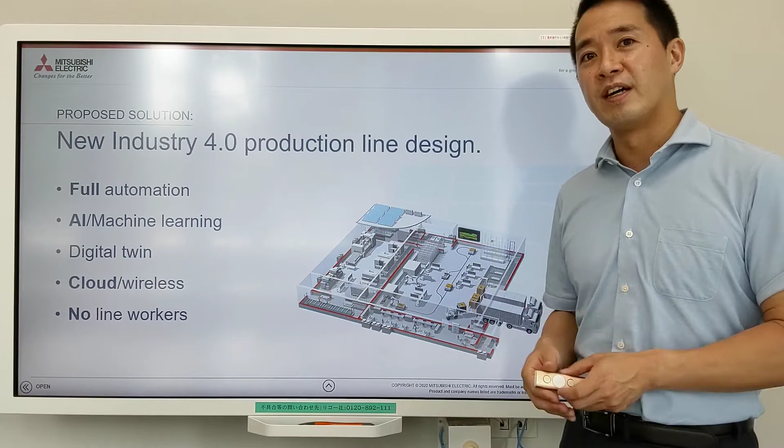Here's an example that happens a lot. New Industry 4.0 production line design. So there's a new product coming out and they want to do an investment. So they said, oh, this is a great idea to test Industry 4.0. So let's do full automation. We want to install AI and machine learning. We want to do the digital twin. We want to connect cloud, use wireless 5G technologies, and make a fully autonomous factory with no line workers. Okay, let's start the project.

But a lot of time, the proposal is rejected. The first is the high cost involved in these kind of applications. Normally, a production line manager is used to working with machines, robots, PLCs, sensors. But if you want to do this kind of Industry 4.0 type application, you're going to need different aspects. You're going to need to calculate the server costs, the cloud costs, the AI costs, the drone cost, and all the communication costs related.

And usually we are not used to working with those kind of vendors. So it takes a lot of time to get the quotes together. And when you get the quotes, usually it's an unbelievable high amount of cost. Okay, you look at the quote, but this is the cost of Industry 4.0 and IoT. As long as I get the return on investment, then we can justify the costs. So then they start calculating the return on investment.

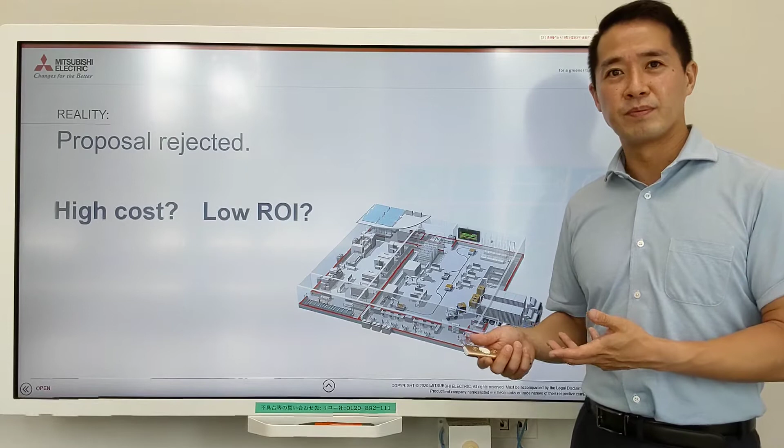But it's really hard to calculate return on investment in Industry 4.0. For instance, predictive maintenance. Can you really predict and estimate how much cost you're going to save? How much time you have saved the line from stopping? How much is AI going to help you, even before you get a result? So it's really difficult to calculate the ROI as well. And what happens, and what is the true story, is that nobody knows about Industry 4.0 industrial IoT because nobody's made the factory by themselves.

At the end, a lot of time, the project is rejected because they cannot justify the ROI. They sit down with management, they look at the high costs involved and say, okay, maybe it's too risky, it's too expensive. Let's do it the second time around. And the project doesn't go through. And this happens a lot.

Another company says, okay, we don't want to do a full-scale production line. Let's maybe go into detail for this machine because it stops the production line a lot with quality issues. This is an example of a customer that has a plastic injection molding machine, and a lot of times the quality goes bad in the product.

So they said, okay, we have this quality issue, but if we look at the parameters of the machine, we monitor the electrical currents, vibration, maybe we can find out the problems of the product quality before it goes wrong. So they said, okay, let's use data, let's do a data analytics project for predictive maintenance for this machine. We want to improve quality, and in order to do that, we're going to use real-time data collection, real-time data analytics, edge computing, and AI to do this.

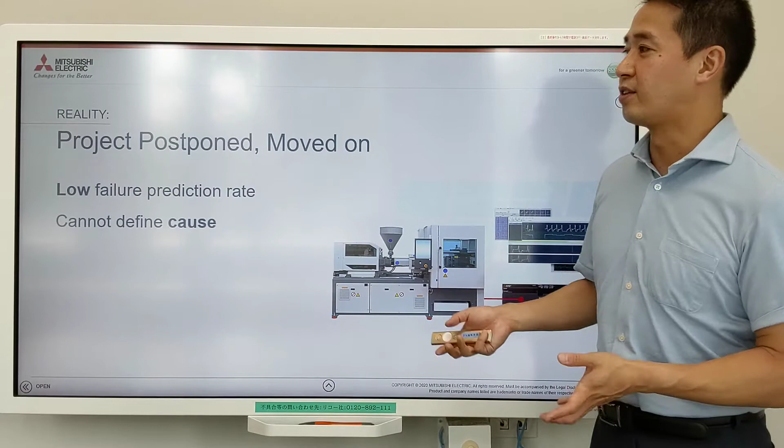The other issue is, even if they could find that something was going wrong in the machine, they detected the data was going in a bad direction, they could not define the root cause of the failure. So they could not say, okay, this motor is going wrong or this gear is going wrong. So what they had to do is maintenance on the entire machine because they couldn't find the problem. So they had these two issues and said, okay, this is not fit enough for manufacturing.

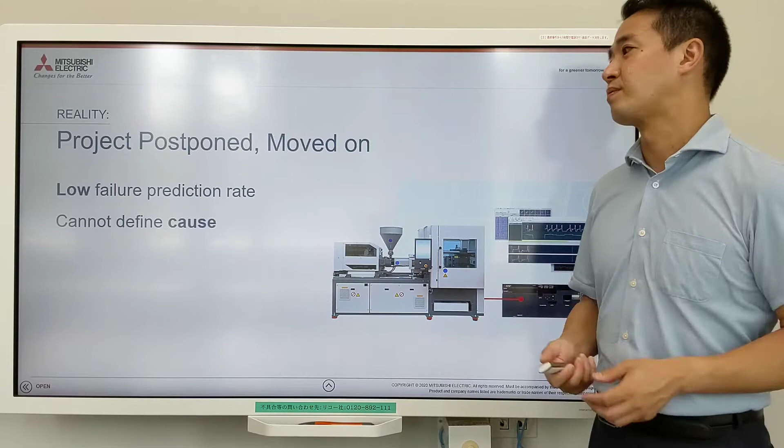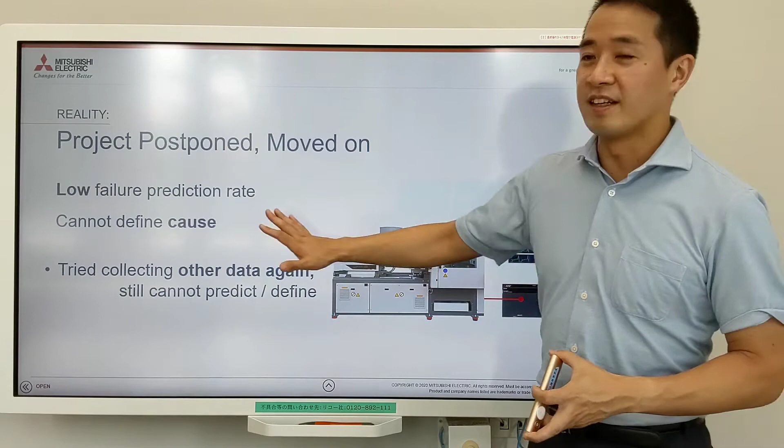What they did is they did it again. Let's try other data, collect other data again, and then see if we can find the root cause and raise this failure prediction rate. Okay, it moved from 50% to 70%, but still 30% of the time they could not predict that it was going to fail. And they still could not define the root cause of failure. So another 3 months wasted, total 9 months wasted. So they said, okay, this is not good enough for prediction. It's probably better off if we do maintenance on this machine periodically.

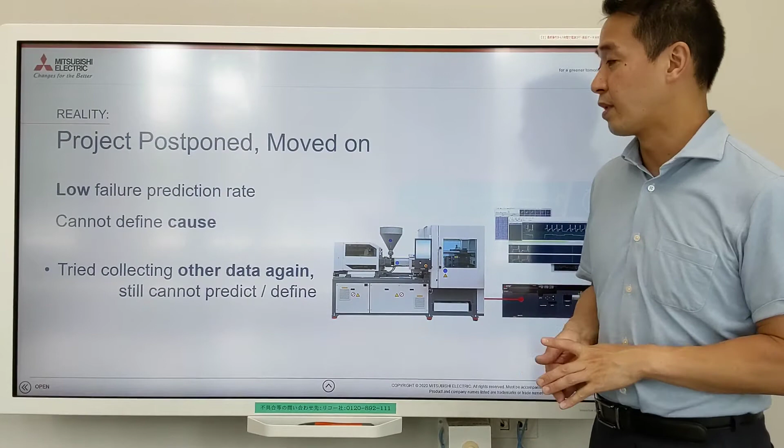And on the other hand, usually when you do IoT projects, you're using your ace engineers on the factory floor. So they had the ace engineers on this project tied up for 9 months. They said, okay, this is not a good use of resources. Let's fold up this project and use these key engineers on something where we can get a better ROI. There's no sense in doing this project again and wasting another 3 months or 6 months collecting data. So they moved on, and the IoT project stopped.

These are just two examples of failures, but there are many, many more failures in IoT that we've heard from our customers. For instance, you monitor the energy in your factory, but you don't know how to save the energy. You're just monitoring and looking at these neat screens. You're trying to install sensors into old equipment in order to gather data, but the installation cost is incredibly high because you have to reroute the wiring, and sometimes you even end up engineering a new machine because it takes too much time putting these sensors on an old machine.

Data analytics are very complicated. A lot of times the factory staff does not know how to handle it and use the software, and then you use consultants to try to help you. But of course, the consultancy cost for data scientists is not cheap. So there's all these failures. So, it's not easy, industrial IoT.

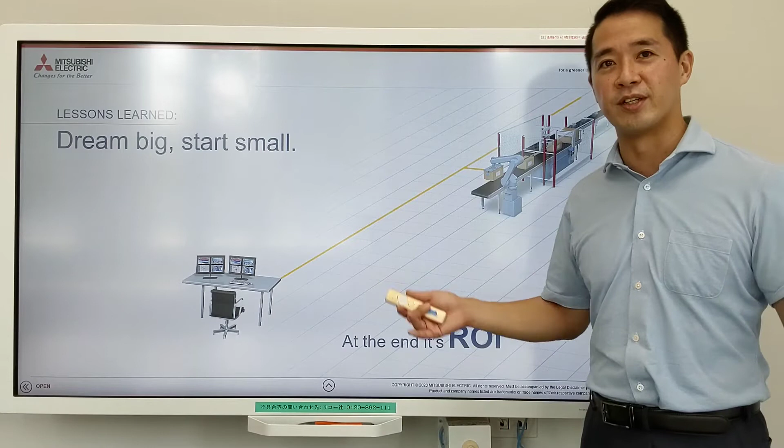One advice and one lesson we learned ourselves is, of course, you need to dream big when you do Industrial IoT or Industry 4.0. There's a whole picture, including the supply chain, how you want to integrate data, put it into the cloud. But when you do these kinds of IoT investments, you want to start small, where you can calculate. Don't start with the entire factory line. Start with a single cell, for instance. Go to the packaging machine, see if you can replace it with a robot, see if you can use the data to improve your processes, and calculate if you're really getting return on investment on this application.

I mean, at the end, you can spend tons of money on Industry 4.0 and IoT, but if you don't get the return on investment, it's not worth it. Right? We're in manufacturing. The main driver is cost.

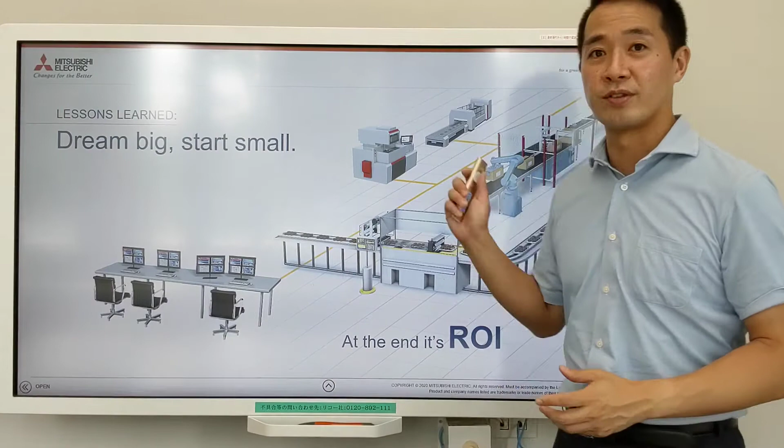If you're successful at this, then you can move down the line. Okay, try other machines, see if you get ROI, and if with each machine you see you're getting your ROI, then you can look at the production line as a whole. So it's a step-by-step process, but always calculate the ROI.

One more important thing we think is to set KPIs and agree on this with management. Where are you going to put IoT, what level you're going to put IoT, and what direction you're going with IoT. Because the expectations from the factory management, which usually don't have a lot of knowledge about IoT, are very, very different from the expectations and the results that the production line can produce.

I mean, mostly management thinks with even a small investment, you can get data analytics, you can get AI, and you can get Kaizen, which is not really the story. So first, when you start a project, you always want to be in agreement with management on what you're going to achieve out of this project.

I have a map over here, and if you think about it, when you ride a boat, you always want to define if you're going from Japan to Europe, or if you're going to Hawaii, or if you're going to Africa. Why I'm saying that is because the resources from people, the food you put on the boat, and the gasoline you put on the boat are totally different.

And you need to define these resources before you start the project, because it's going to cost money. So that's why we always say, okay, first set some KPIs, what you're going to achieve, and then start the project.

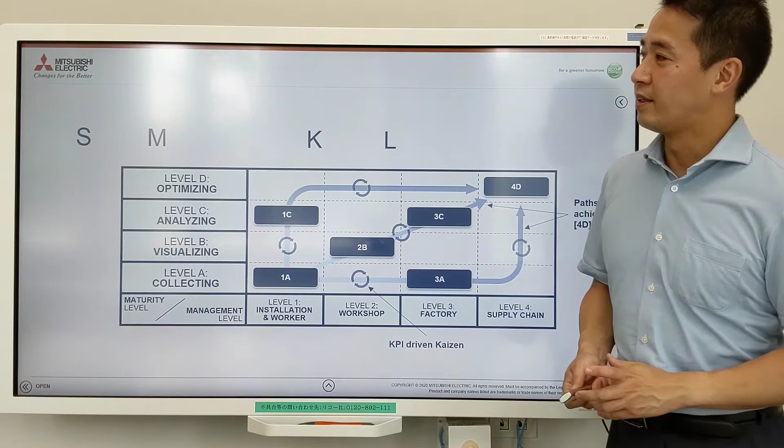This is why in Mitsubishi Electric, we use this kind of KPI agreement process called Smart Manufacturing Kaizen level. When we start a project, we always try to decide with management where we're going, what level we want to achieve with IoT, and then define the KPIs related to that.

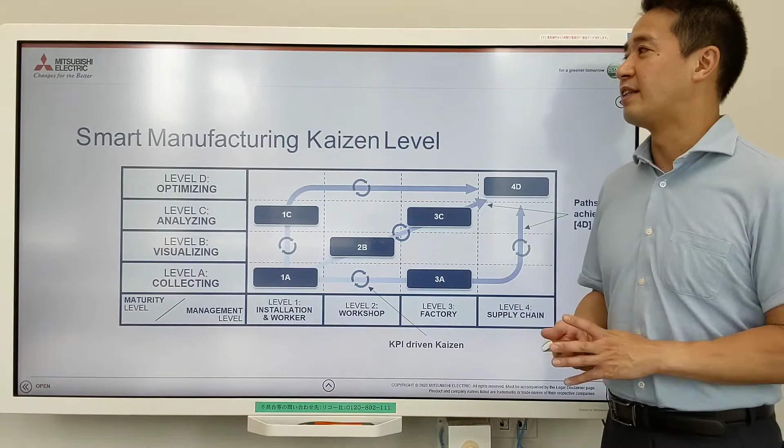After we install the project, we talk again and say, okay, this was achieved, and we got our ROI back, so can I move on to the next level? This is a kind of tool that we use to get everybody in sync.

In the first survey, I talked about how there need to be steps in going into manufacturing. I mean, most of the companies want to do Kaizen, they want to use AI, and they want to use optimization, but without data, you can't do anything. So that's why, in terms of maturity level in a factory, we always start with the level where first you have to collect data.

Only after being able to collect data can you visualize it. After you visualize it, put it in charts, then you can analyze it. And after you analyze it and you're able to say, okay, something is going wrong, so let's send an alert, then you go to the phase which is called optimization.

For instance, okay, we've analyzed that the temperature is too high, then let's open this valve so we can put in air and water to lower the temperature. It's always a step-by-step procedure with IoT. In order to get to this analyze phase, this optimize phase, you first have to collect. So the first steps of investment are always collecting the data and visualizing data. And this is a step-by-step process.

It also corresponds to the area; you have to go step by step. I mean, you're not going to be able to do IoT Industry 4.0 in the whole factory. It's always a sum of the individual parts. So first, for IoT, you would work on a manufacturing cell level or a machine level. After you're able to achieve IoT on this cell, then you can move to other machines.

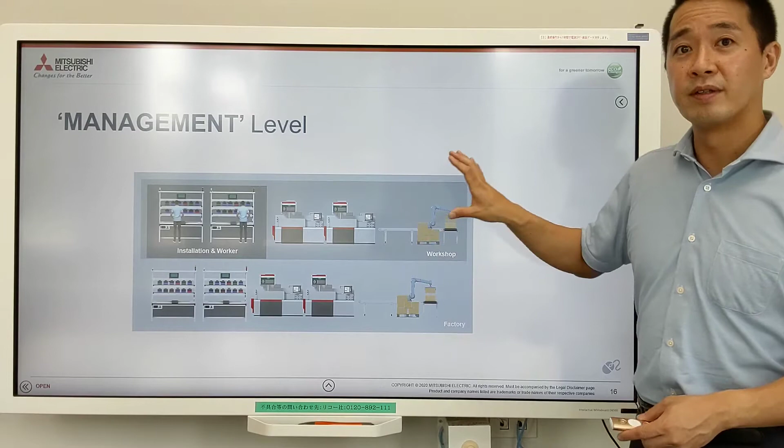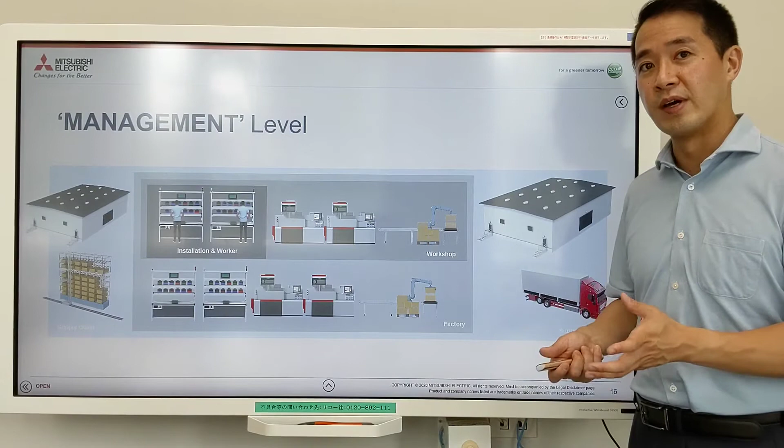And if you're able to put IoT on all these machines, then you can do the analysis and optimization of IoT on a line level. Then you combine lines together, manage IoT as a whole, the entire factory, and after that, you can start working with separate companies, external companies, in order to optimize your supply chain. But as I said, it always starts small, and then you have to expand. So it's a step-by-step process to do this.

And that's what we do. You need to take a step-by-step process in order to achieve industrial IoT throughout your factory. So if you're talking about an assembly line, you first work at a cell level. You say, can I collect data in this motor assembly cell? You use RFID, use sensors, use barcodes. Now I'm ready to visualize what happens in the manufacturing cell.

After you visualize, then now I'm going to do analytics, and finally you're going to go to the optimization phase where you optimize the data automatically. If you're finished with that cell, you work on the other cells, and then you can move to the workshop level, factory line level, and eventually you'll go to the factory level. But you have to go step by step. You can't skip all the way to the factory. It always starts with an individual cell, and it always starts with collecting data.

Interestingly enough, sometimes it goes a different direction. For instance, if we talk about energy saving, you don't want to work on small energy savings where it's not crucial. First, your goal is to find out, in my entire factory, where am I using the most energy? Because the factories that use the most energy have the most room to save energy. So first you would do monitoring of your entire factory. Which factory am I using the most energy in? And you're saying, maybe my motor factory is using the most energy.

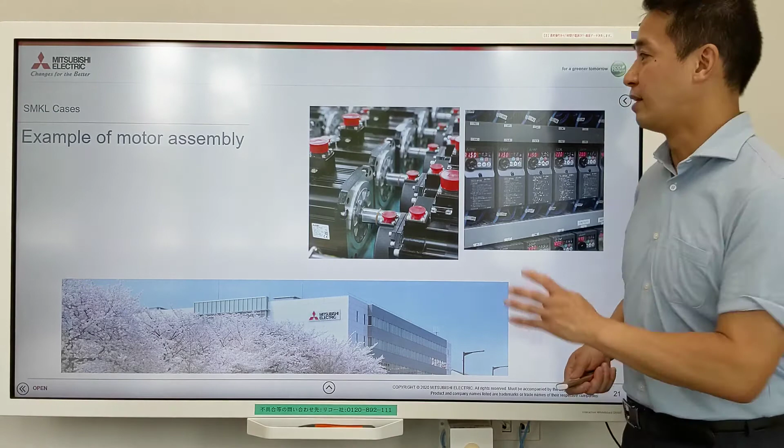And in order to do that, I want to do these kinds of IoT investments. It's going to cost this amount of money, but it's going to save this amount of money in production costs. We lay these out and we make these application sheets to submit to management, so that everybody agrees on what we're going to achieve this year in manufacturing. Then we make detailed proposal sheets of how we're going to implement IoT for each production line. In this case, I want to show you an example of our motor assembly lines.

We had some issues with the motor assembly line, and it's good to always start with pain points, because the pain points are the places where you definitely have room for improvement. In this case, we had a manual motor assembly line, but the issue was it took a lot of training for a new worker to learn to assemble a motor. First, he would look at these kinds of books and study by himself, and then he would practice by himself, actually assembling the motor. In the last stage, he would practice with a supervisor, who would stand by him or her and check if the assembly was done correctly, but it took a lot of time.

The other issue we had was there were a lot of human errors in the assembly process, because there were many, many different types of screws involved. So there was potential for mistakes of using the wrong screw for the wrong hole.

And these kinds of human errors happened with new employees, but they also happened with what we call since-a-while workers: because we rotate our workers, they haven't made this motor in 2 or 3 weeks, so they forget how to do it correctly, and they make human errors too.

The other thing was efficiency. We had problems with this manual motor cell because we were only monitoring their efficiency with stopwatches. So every 2 weeks or so, we would take a stopwatch and try to record how efficient they were in manufacturing. So it was difficult to analyze the efficiency of our workers. So these were the pain points, and we said, okay, can we use IoT to solve these problems?

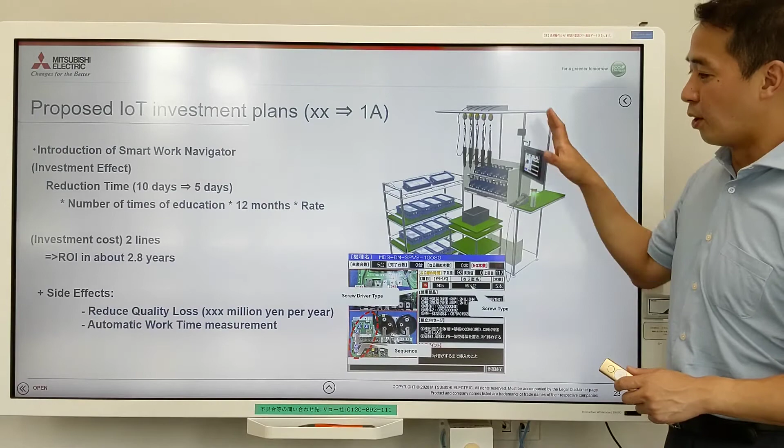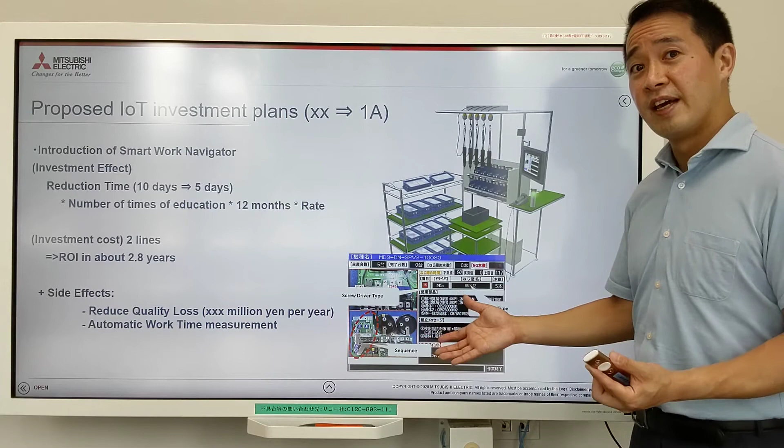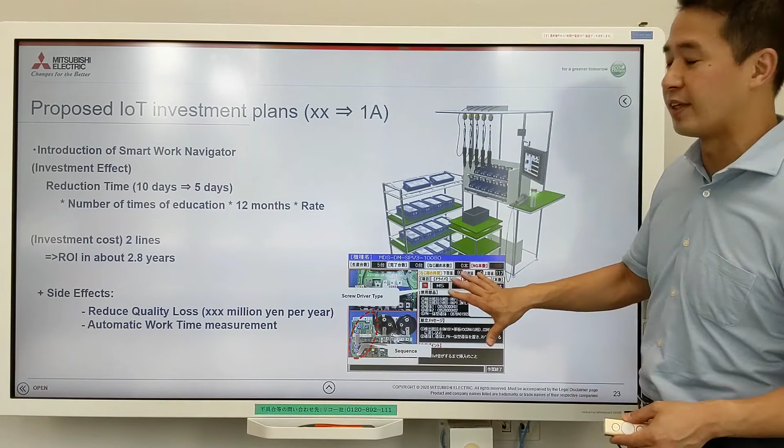So we said, okay, let's use IoT to solve our problems. And we proposed the introduction of a smart work navigator system. It looks like this. We have a screen, and it automatically tells the worker step by step where to put the screw, which screw to use, and the points he has to be careful about when assembling a motor. The good thing about this is he doesn't have to look at the manual and learn by himself. It's easier to educate them because they just have to look and follow the instructions on the screen.

So we said, okay, if we do this, of course we have to double check if the employee is doing it right. We should be able to reduce the time of education for an employee from 10 days to 5 days. So this is double, because it's not only the assembly worker, it's a supervisor. We reduce the time for him as well. And then we calculated the number of times of education we do for new workers over 12 months, and the hourly fee rate for the workers.

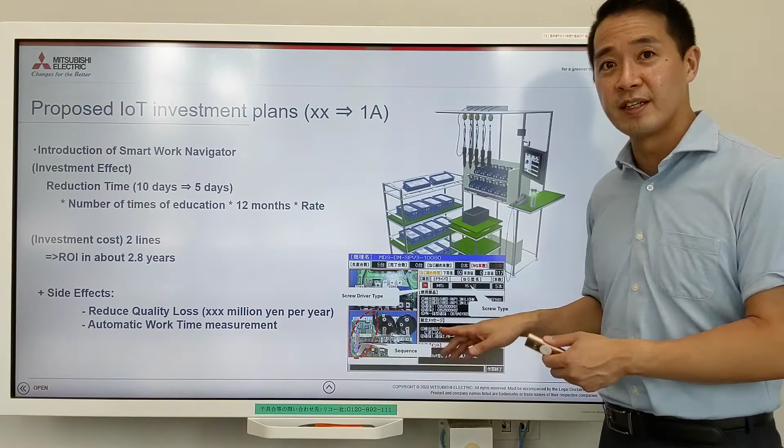Then we calculated the investment cost for this line. We'll put it in 2 lines, and then we get the ROI. We said, okay, we should be able to get back the costs in about 2.8 years. Of course, it's 2.8 years, but we get other beneficial effects. First, we will be able to reduce quality loss because they will be sure to use the right screws in the right places, because the instructions are very easy. And also, by installing this kind of system, we will be able to automatically measure the time needed for each process, because every time they press a button, it moves and it automatically records how long it took.

We got the approval for this, so we installed it on our factory line. And we were able to reduce the education time. So this was theory, and we monitored it. We were able to eliminate assembly human errors. We were able to automatically measure and check data when they were tightening screws. And we were able to measure the assembly time by worker by process. So at the end of the 1-year review, we told management, see, we achieved ROI and it was a good project. Okay, let's move on to the next step.

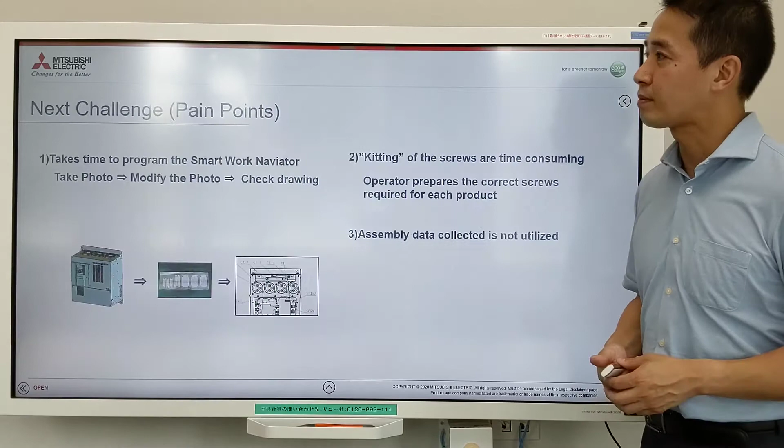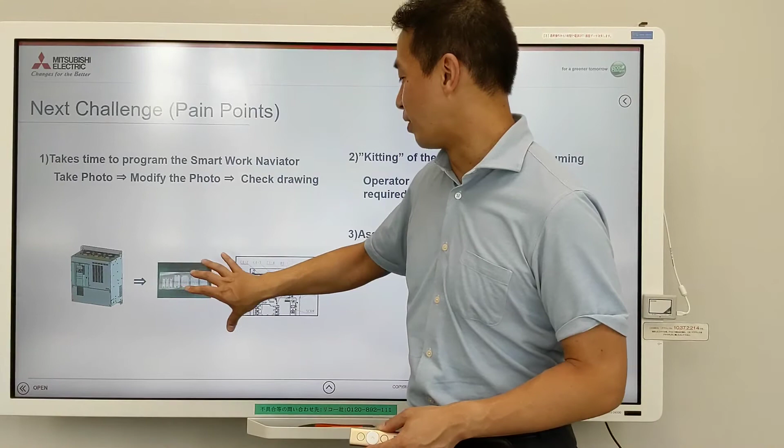Because this was good, but we found out a lot of other issues when installing IoT. These were our next challenges and pain points. First of all, the smart work navigator is not automatic, so you actually need to take the photo, modify the photo, check it with the drawing, and program the smart work navigator system. So this takes a lot of time itself. The other problem is we were spending a lot of time kitting the screws. The operator was preparing the correct screws required for each product and then handing them over to the worker, but this was time consuming.

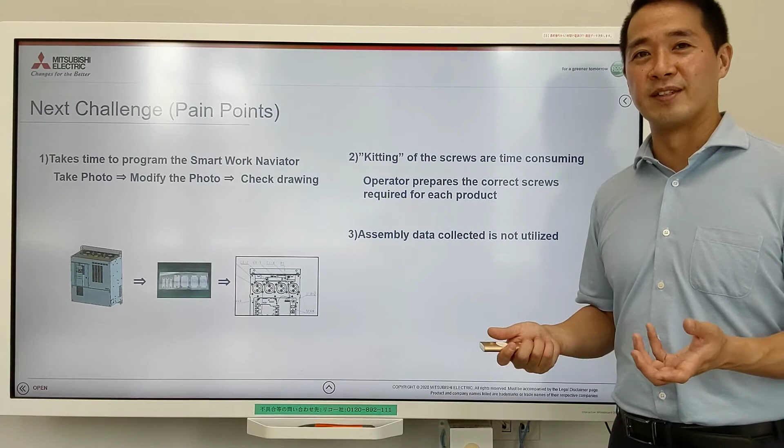The other thing was we were able to automatically collect the data, but we weren't using it. So we had the data and it was just lying around, because it took a lot of work to reconfigure the data into the format we needed to understand how to use it for Kaizen activities.

So we made the next investment plan and submitted it to management. In order to simplify the preparation of the digital manuals that we put in our smart navigator system, let's leverage the 3D data from the design phase. We know our engineers had 3D designs when they were creating the motor product. So is there a way to put in a system that automatically takes out the data and puts it into this assembly system? Okay, maybe there's a good way to do that.

The other one is, okay, rather than kitting the screws and giving it to the worker, if we can automatically tell the worker and show the worker which screws to use at the assembly table, we will be able to reduce the time of the kitting. So let's install a Pokayoke system. The other thing is, okay, let's introduce a data utilization system so it can really pinpoint the bottlenecks of who's taking a lot of time in assembly.

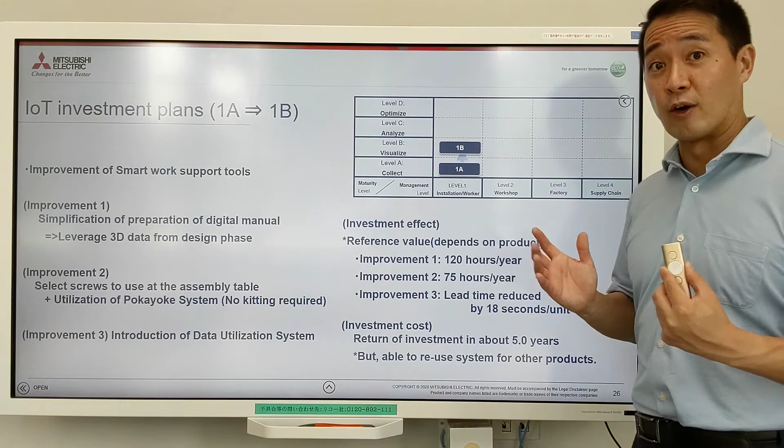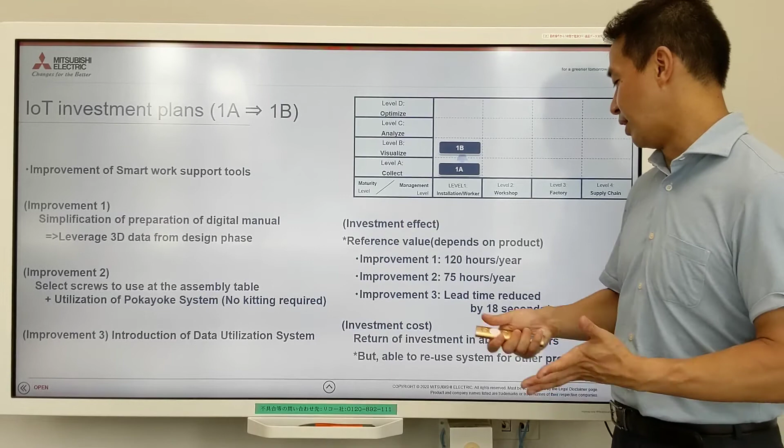So again, we have to prove ROI to our management. So we said, okay, improvement 1, we'll be able to save 120 hours. Improvement 2, 75 hours. And with improvement 3, we should be able to reduce the lead time by around 18 seconds. We calculated the investment cost.

It's about 5 years, which is very, very long from our standards. But we decided to go ahead with this investment because we were sure these systems could be used in other production lines. So, of course, it's 5.0 here, but when we install the other production lines, we will be able to get faster return on investment periods.

So these are the results that we showed. Okay, it was simple: by using the 3D simulation data that we got from the engineering section, it was easier to make these kinds of smart navigation system manuals. We were able to eliminate the assembly errors by using a Pokayoke system. As you see over here, when the assembly process comes up, it automatically has a light, and they pick up the screw where the light lights up. So no mistakes, and also most important, no kitting necessary.

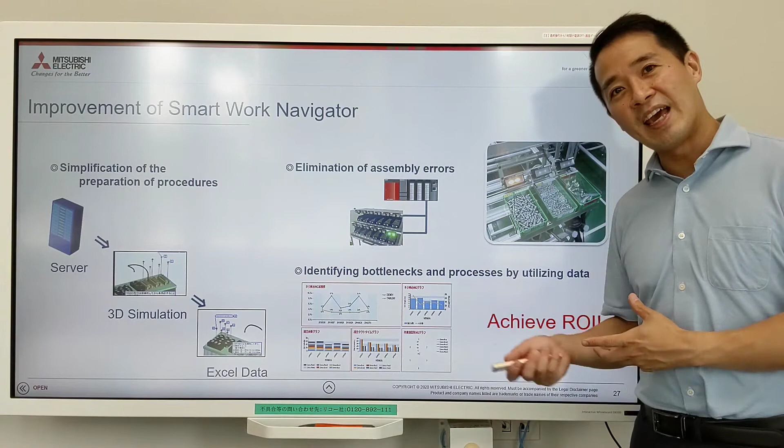And we made a system so we can immediately identify the bottlenecks in processes by utilizing the data we collected. We were able to show that it was correct. We got the return on investment. Our management was happy. And the process goes on. We had to go to the next steps. Because every IoT project is not a dream story. It always has its issues.

We found out other issues because in the middle of the night, we had a network issue with our central server going down, and all our networks went down. The issue with this is because all our navigation screens were connected to a central server, and every time they changed the product, we had to retrieve the data from the server. With the network down, all the assembly cells had to stop.

It was the middle of the night, so no network expert was on hand. There's nothing we could do except wait till the network engineer could come to the factory and get it running. What we thought is, okay, we have to fix this because it was a huge loss. We were stopping the production line for 6 hours.

So let's use edge computing. We need to have the capabilities to work even if the network goes down. So maybe we should save this kind of screen data in edge computers near the factory. Also, we said, okay, but there's going to be other network issues in the future, and sometimes maybe something will happen with the edge computer. So we have to have a backup plan where we are able to assemble things offline, not even using the smart navigation system. So emergency plans.

The other issue is, okay, this kind of smart navigation system was good for new people and occasional workers for assembly. But we have very, very good skilled workers working in the assembly line that don't make any mistakes. It's proven by data that they're very fast and efficient and their quality is 100%. That's why we also said, okay, doing this step-by-step process with our skilled workers is actually slowing them down. So we're introducing an expert mode for these skilled workers where we're making sure that we're checking the quality 100%, but they can move at a different level and speed.

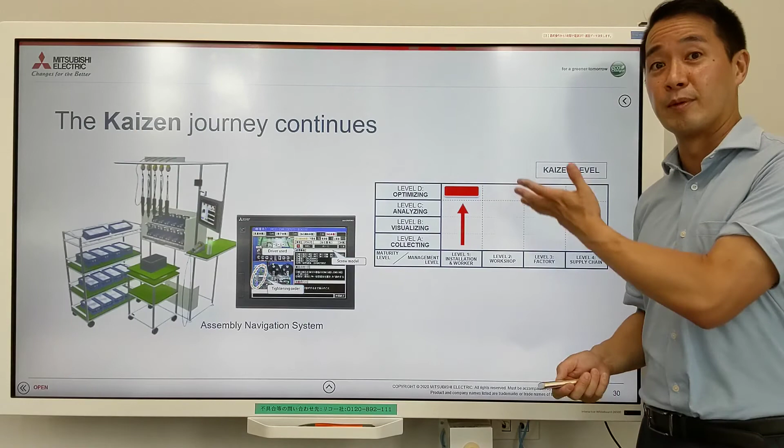Okay, our Kaizen journey continues. I'm sure your Kaizen journey is continuing. But also as Mitsubishi Electric, we're trying to use these kinds of systems and also provide them to help you, because we've already gone through these kinds of journeys, and we have a lot of easy tools to use when you try to do the same approach in your factories at a cell level, and sometimes at a factory line, workshop level, or SCM level.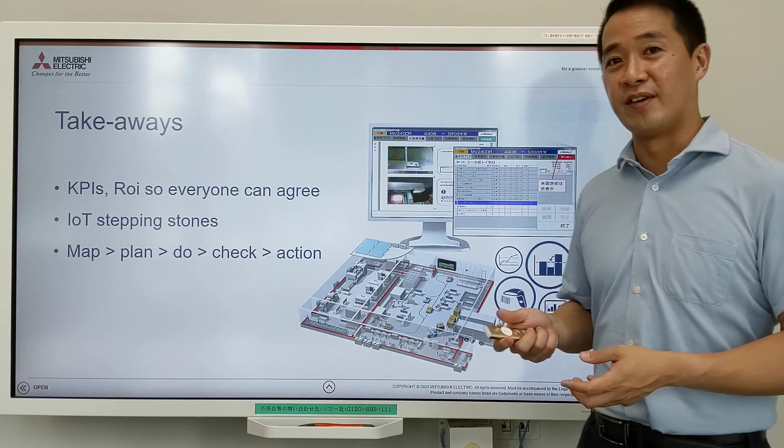Okay, this is the end of my presentation, but some takeaways. KPIs, return on investment, you have to agree on this, and you have to be able to prove it, and IoT stepping stones. So you can't go to entire factory AI in one single shot. First, work at a cell level and see if you can achieve the ROI necessary, then you can go to the next steps. And it's not rocket science.

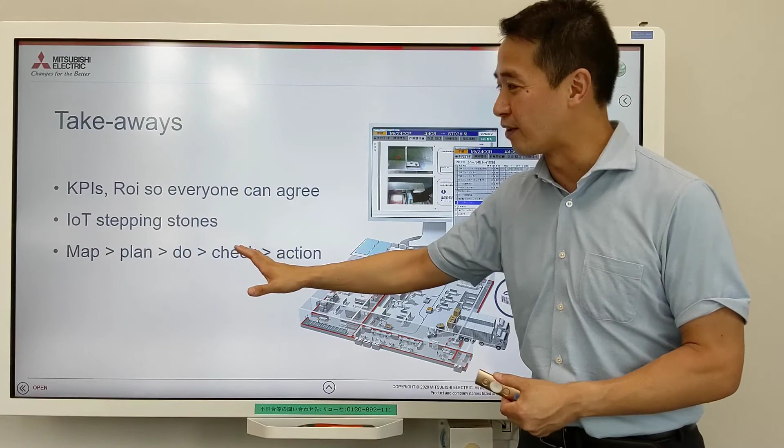It's basic: map your IoT activities, plan your IoT activities, do your IoT activities, check if it's working. If it's not working, then modify. So this is the roots of manufacturing in Kaizen. This SMKL was originally developed by Mitsubishi Electric, but we find that a lot of companies are interested and want to learn how we're implementing IoT.

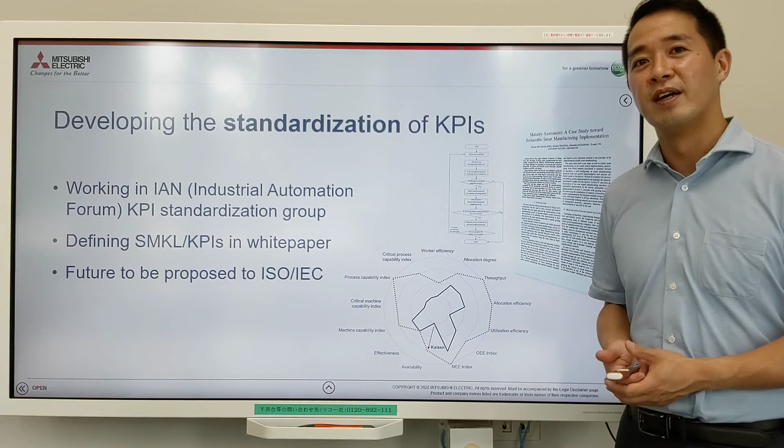So that's why we're working with other companies in an Industrial Automation Forum, and we're trying to standardize the KPIs that we use in smart manufacturing Kaizen level, because they're common for all companies in manufacturing. Okay, what KPI should I monitor? OEE, energy saving, lead time, takt times, quality issues, all this kind of stuff. There are some basic parameters that everybody uses, and we're putting these into a white paper and a standard. And in the future, we'd like to propose this to ISO and IEC so we can share with everybody to make a better manufacturing community.